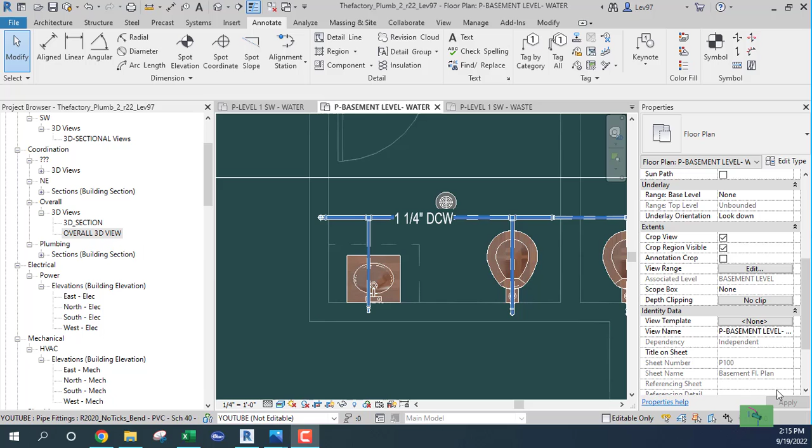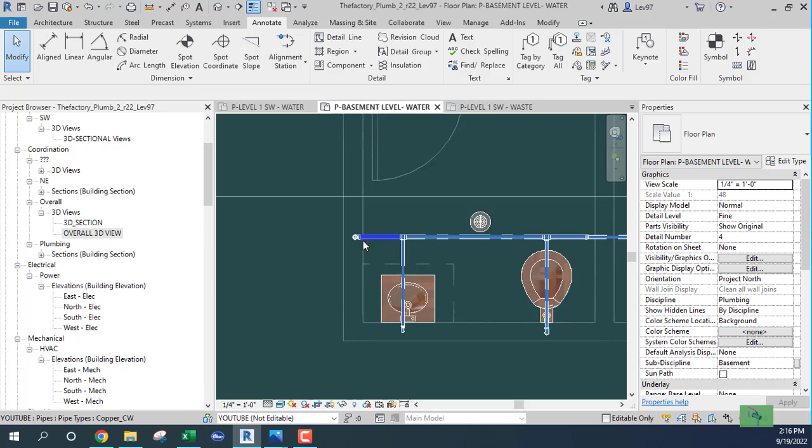Let's see, we're in the basement level. I think that's where I left off. Okay, did I size this? Let's just check. I want to check the fixture units and the size of this cold water that's supplying these two water closets and these two lavatories. I can go to my 3D view and check.

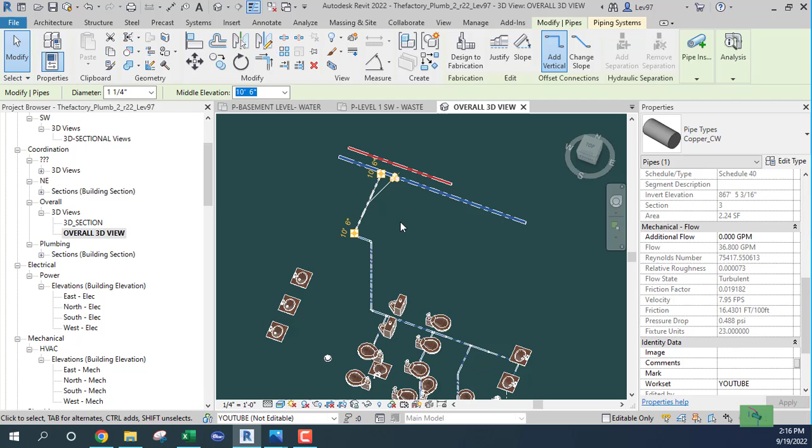So what do I have here? I have 23 fixture units and let's say 40 GPM, right? So what I can do is there are charts, and I'm going to use one here. I think it was 40 GPM. Let's see, it was 23. So these are in intervals of 5 fixture units: 20, 25, 30, 35, 40, and so on. So we have 23, let's say it's 25, and this is what's called a Hunter's curve, or Hunter curves.

The top one is for flush valves, and this bottom curve, number 2, is for flush tanks, or what is usually used in the industry is this line is for hot water and this line is for cold water, because hot water is usually not associated with flush valves. Flush valves are usually on your water closets, right? So that's why they like to associate the top curve with cold water and the bottom curve with hot water or flush tanks. But we have 25 fixture units, and let's say it's 40 GPM for cold water.

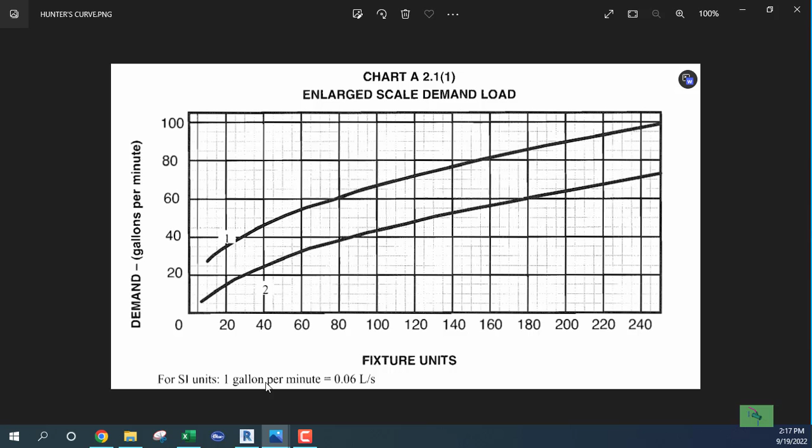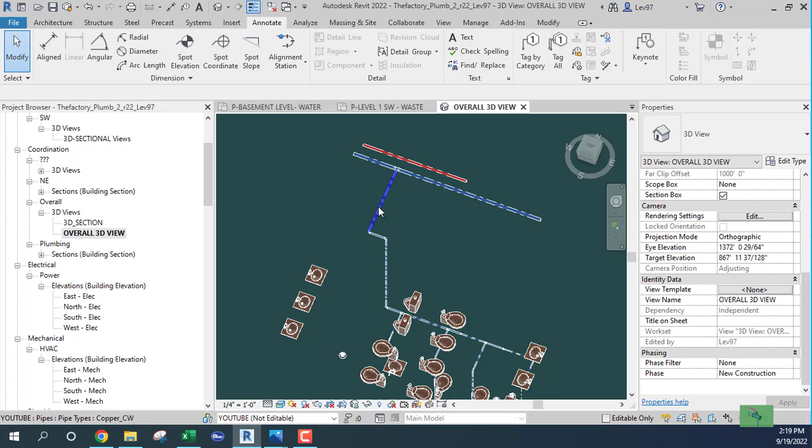So I think I was using 1 1/4. I think I'm going to bump that up. So 7 is about in here. I'm going to bump that up to, say, 1 1/2. So I think this is 1 1/4. Yeah. So I'm going to move that. That's all going down to the basement.

I was looking at this 3D view. If you click on this pipe, Revit is going to tell you up here what level you're on, right? So it's in the ceiling of the first floor at 10.6. So we can change this number, and we can say what it is relative to the basement. It's going to be higher, right? So you can manipulate this however you want to get some kind of reference, but that's what that's for.

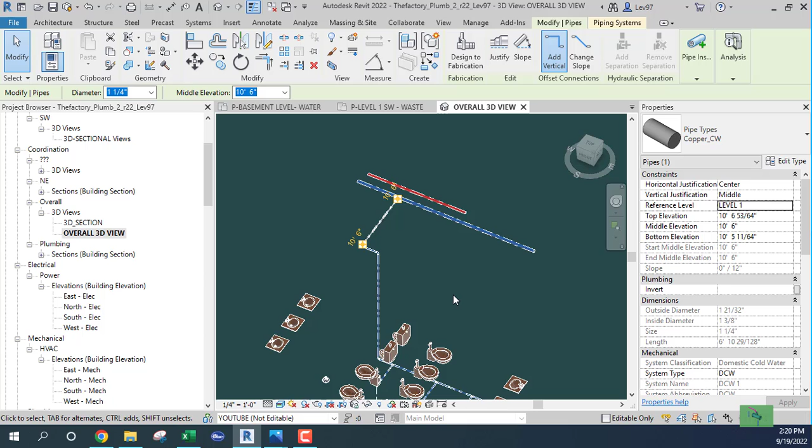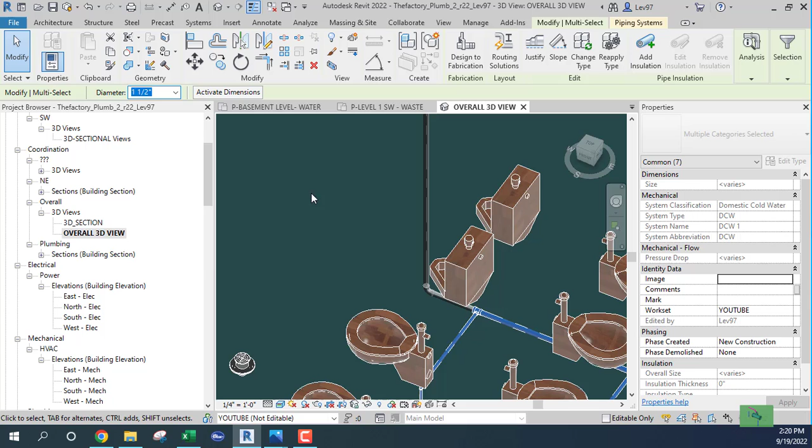So I see that it is 1 1/4. I want to change that to 1 1/2. Can I change all of this? Yeah. Okay. What about here? So I'm gonna control and change all of that piping to 1 1/2. Okay. So then it's gonna change again.

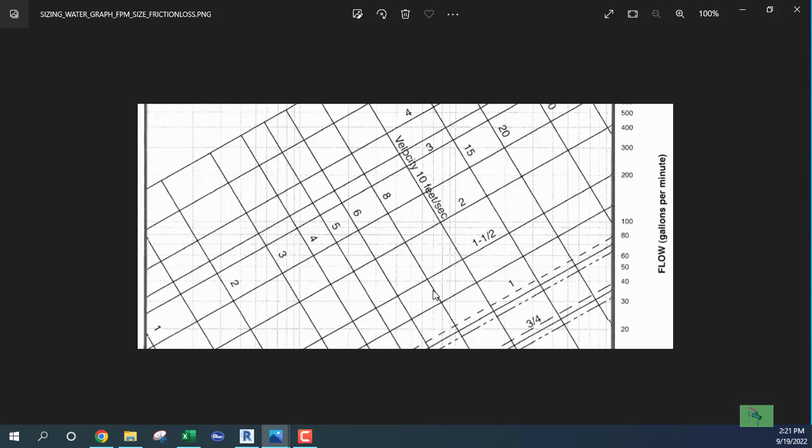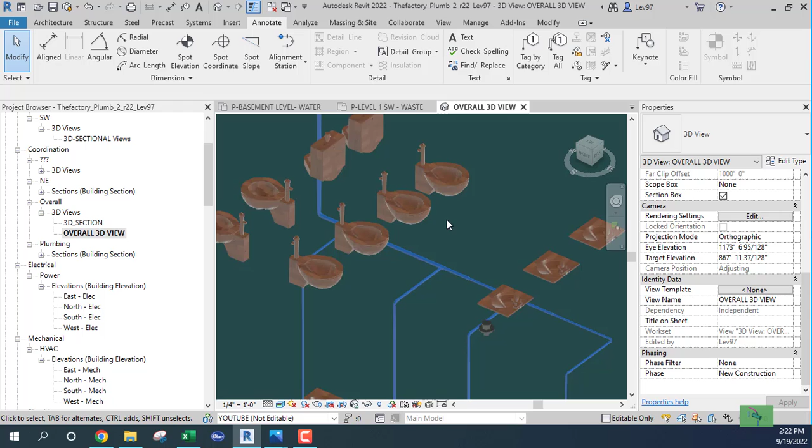But where are we? 35 and 7 are right in here. I should keep that at 1.5. Yeah, I think I'll keep it at 1.5. Just because, let's see, that's 1.5. So I'll keep that at 1.5, because this is gonna feed the lavatories, these 2 lavatories. Okay. So it should be okay now. That's 1.25. So 1.5 to 1.25. Okay.

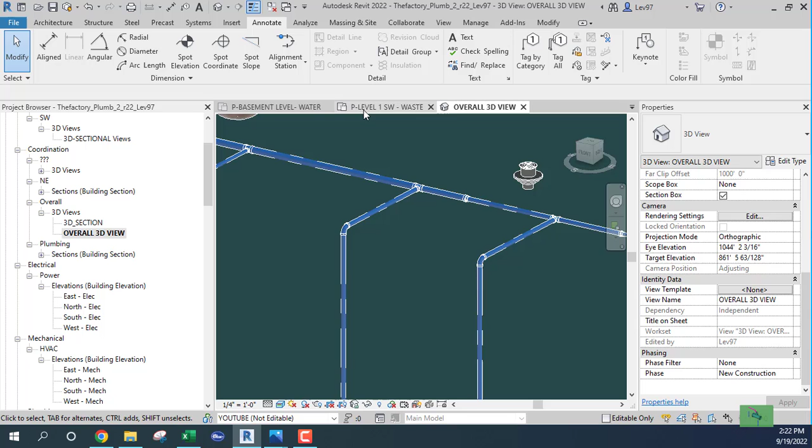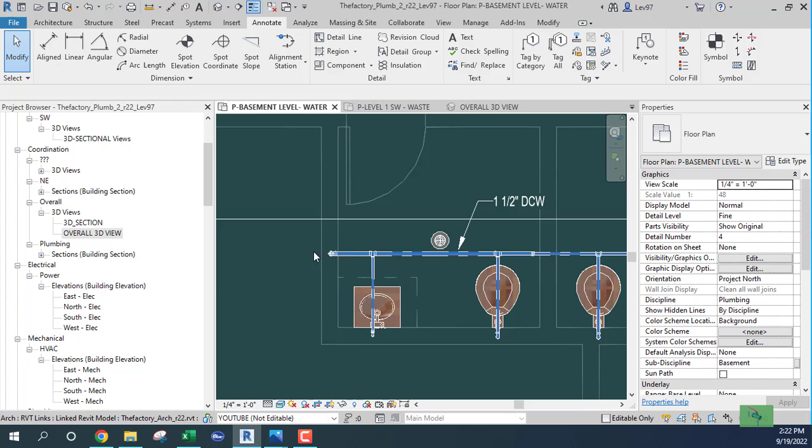Okay, so I think we've solved that problem. Let's go back to the basement level. That's fine. So this should be 1.5. Let's tag it. Free end leader. So we have a 1.5 here, right? I usually don't use notes on these, depending on your office standards. I usually don't write notes on what I'm doing. But just for reference, you go text, and you can choose any of these 4.

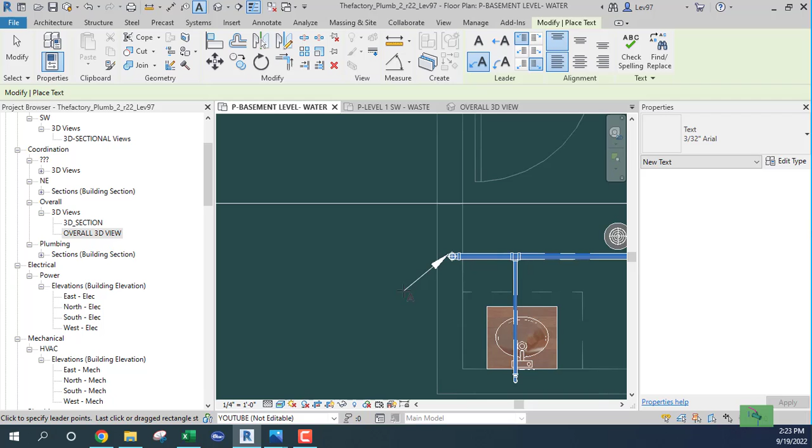That's no arrow. But I'm going to use this with a little leader on the edge of it, and just call it 1.5 inch cold water. Says cold water up. Right? Okay. And that's just text. This is annotative, because you go to annotate here, or you can go text, right? That's the difference.

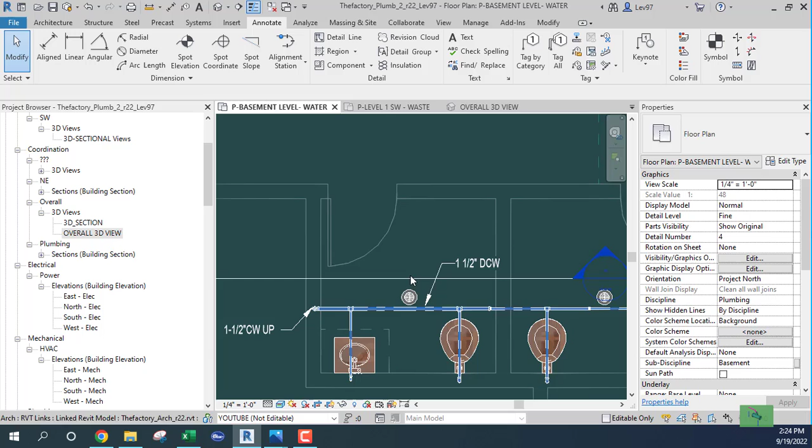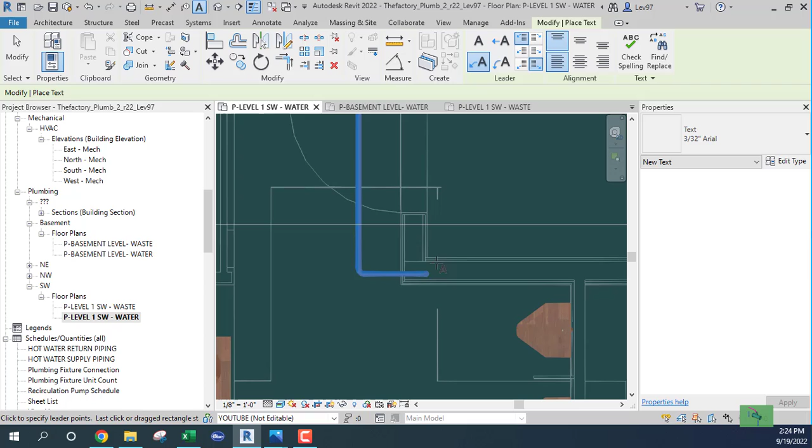Okay. So let's go back up to first level water. Do I have anything? Let's go first level water. Okay. And this is text, 1.5. Say 1.5 inch down, or we use DN. Okay. And that should be 1.5.

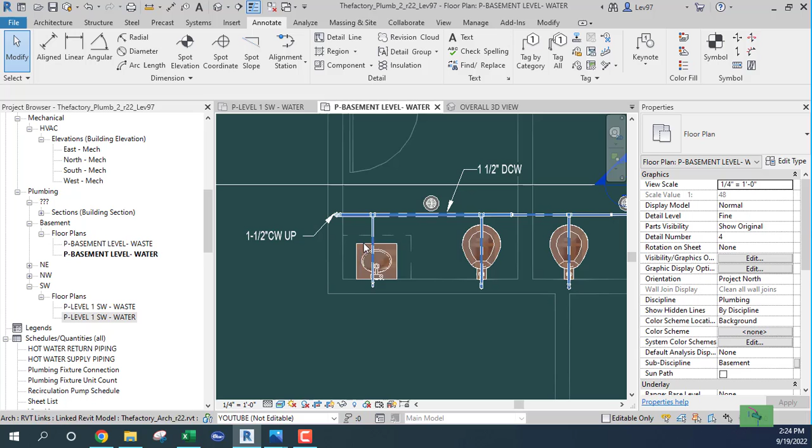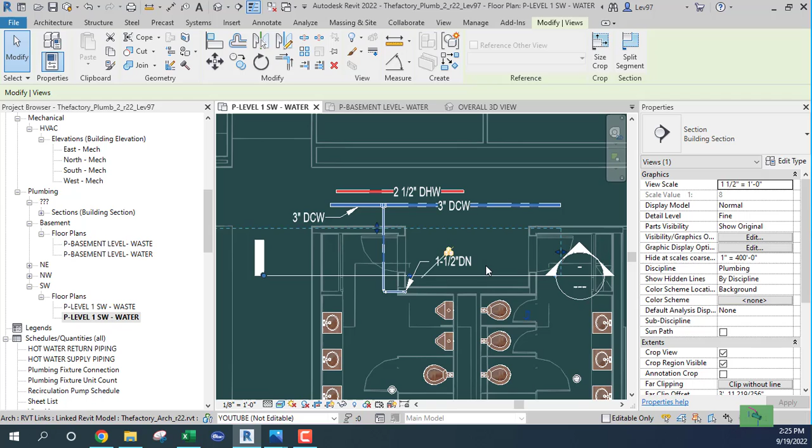Okay. So now what we need to do, I'm going to turn this off, is supply the basement with hot water to supply the 2 lavs here. Let's go back up. First level water, and we come off of this 2.5. It can't be any more than 3/4 inch. Okay. So what's this? Now might be a good time to look at some other information, some other disciplines.

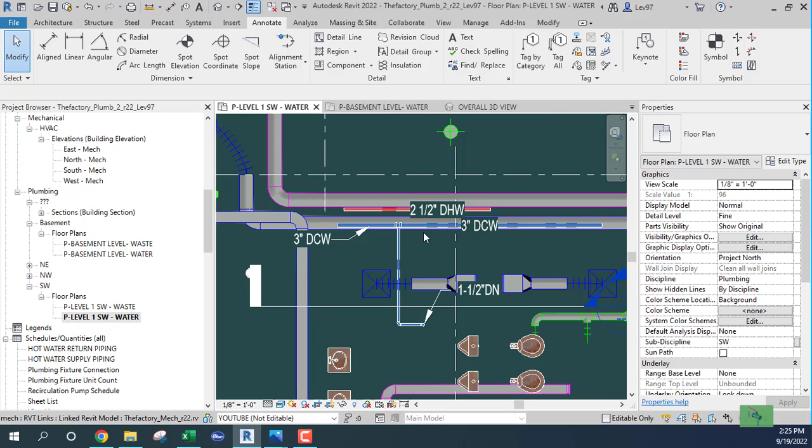Let's look at the mechanical. Okay, and I see that that's 12, and we can select, make sure that if I want to select the link, right? So this is a link model of the mechanical, and I can tab just to get some information off of it. I want to see how high it is. So it's above. Let's say it's above. Okay, you see? That's the reference level of basement. Because I was looking at it like the pipe is actually above, but I know the pipe is at 10.6.

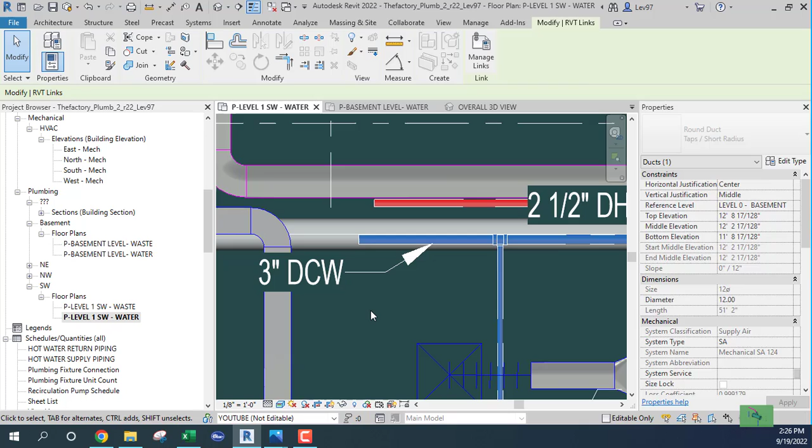So let's change this reference level. Oh, I can't do it if it's a link file. I can change the reference if it's not in the link file. But let's go here. Let's just take a look and see. I'm gonna cut a section through here. Let's go here, and just kind of move this down a little bit.

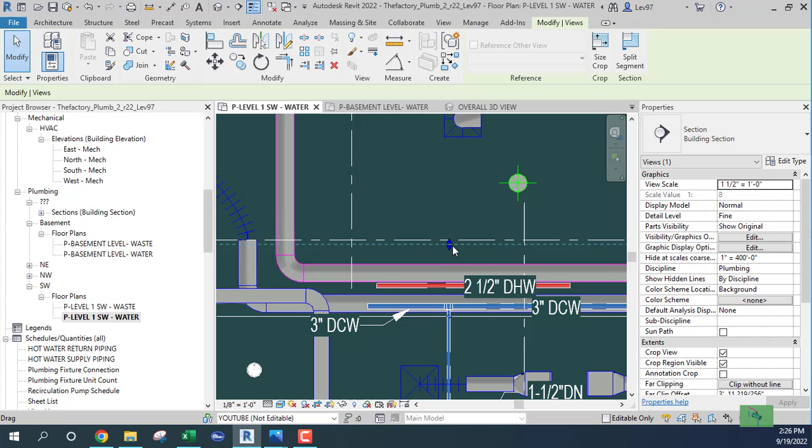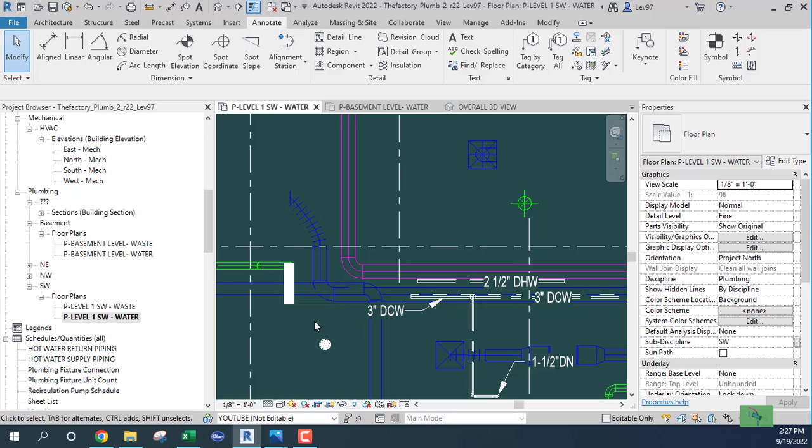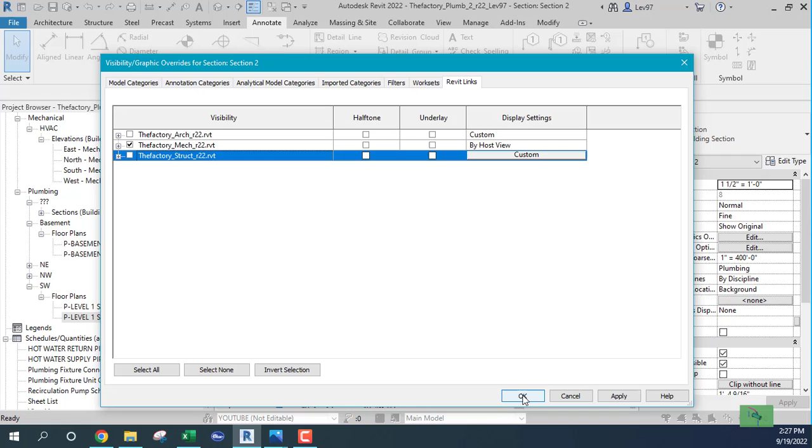Let's do this. Let's go hidden line, medium, fine, okay. It looks like it's above, but let's just take a look. Let's go to view, get our reference. What's our reference here? Okay, let's go section 2, and we're here. Okay, let's turn on the mechanical. Mechanical is on. Okay, do I have enough of it? Let's see, where is it?

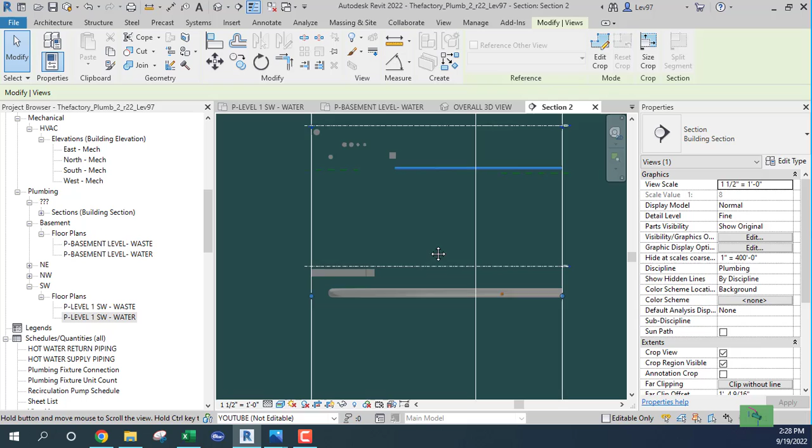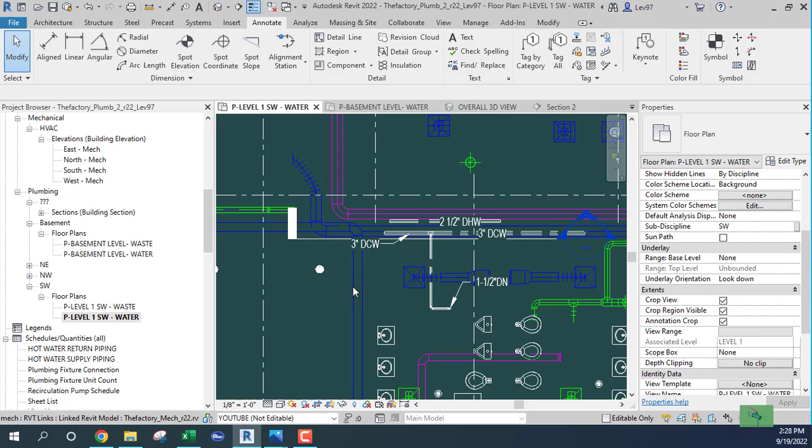Section. Is that it? Level 1. So that's in the basement. Level 1 water. That's in the basement. So I need to check. Let's look at the view range, because I don't like the way that is coming up. Well, wait a minute. Okay, yeah, let's look at the view range. -3. Cancel.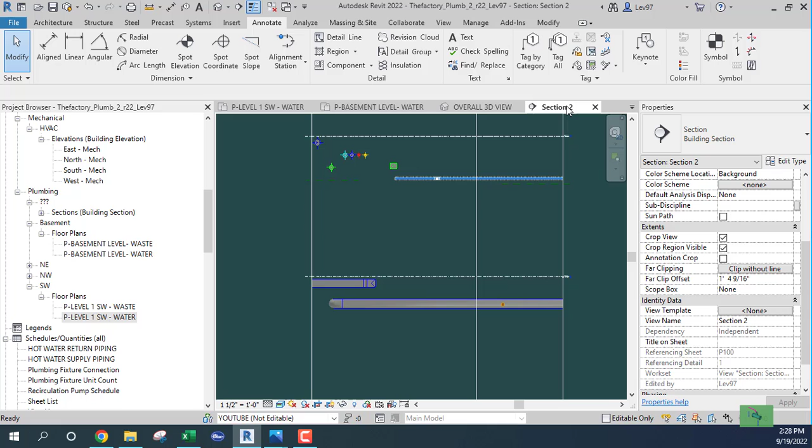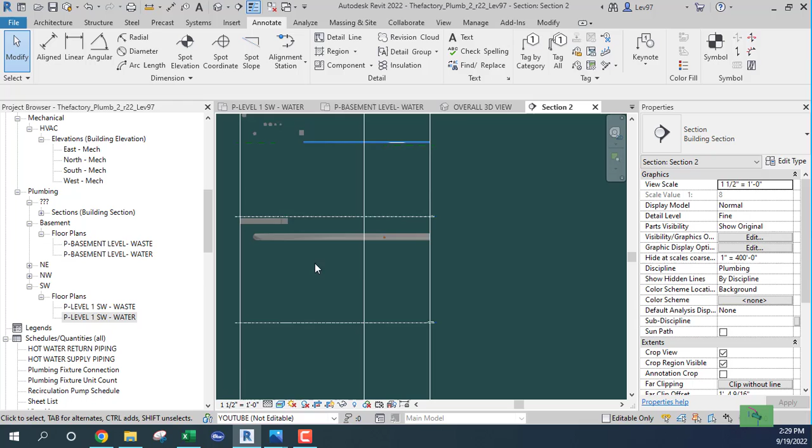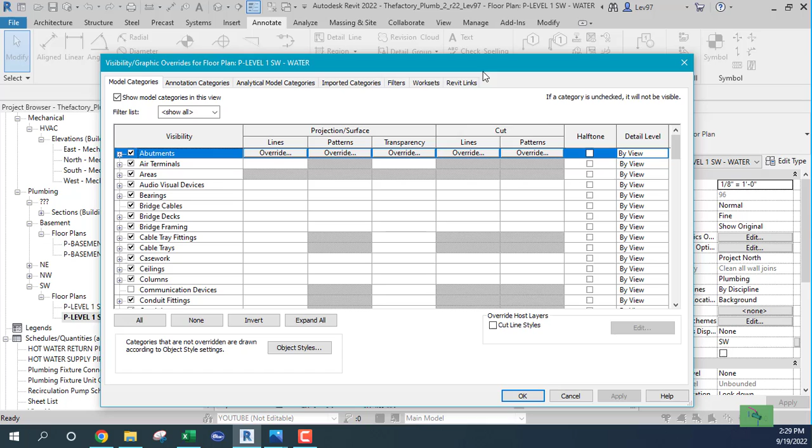Let's go back to this section. And that's level 1. So I'm going to draw a detail line, and yeah, that's why it's showing that 3. Okay, so, well, it's not interfering, that's for sure. It looks okay to me. Let's go back here. Wait a minute. Stay here. No, let's go back and look at the architects.

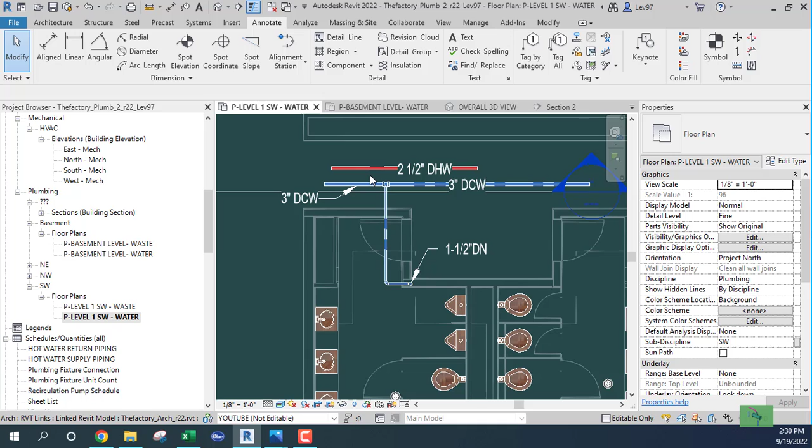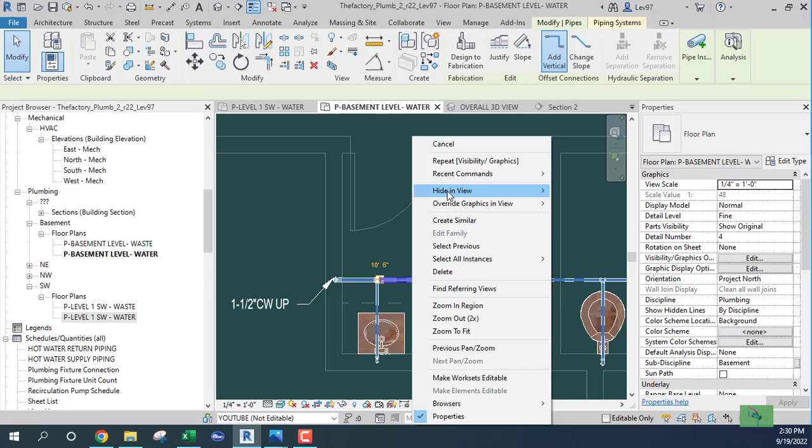So, okay. Let's go back here. And I think I'm going to come across, go down, basement level water. So I want to come down here, let's say. Let's do this. I'm going to create this similar just for construction, and then change this to hot water. Domestic hot water.

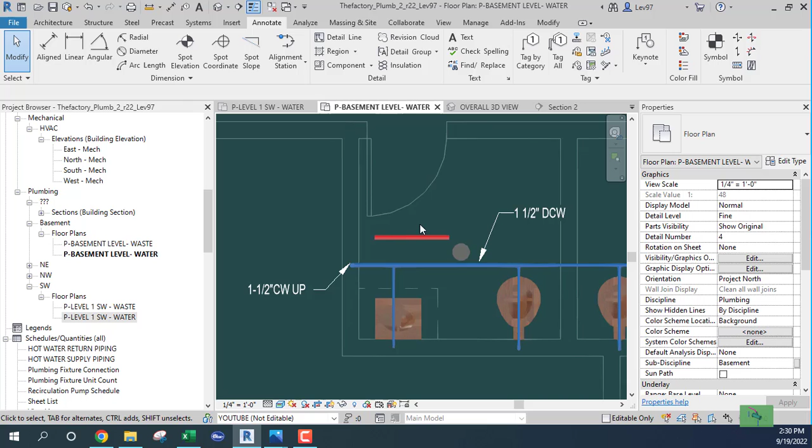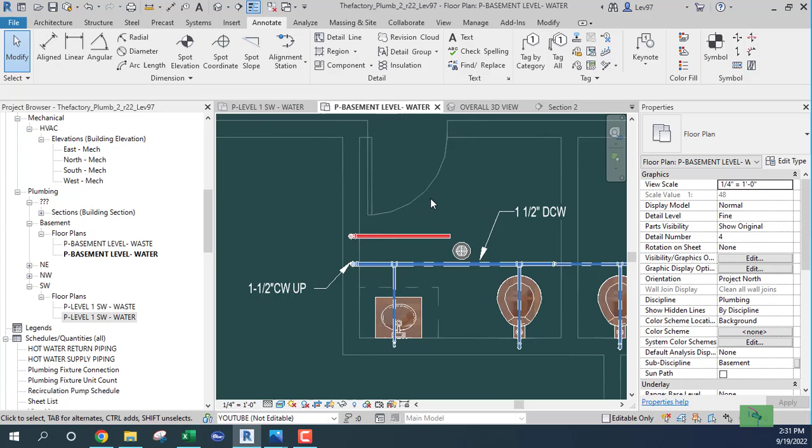Okay, let's turn off the links. And I want to go somewhere along here. Draw a pipe, 10.6. Let's change that to 30 because I'm going up. And say apply here. And I'm gonna move this over, tab. I'm using my arrow keys to go up. And go back up to the first level. And it's coming up here. Okay.

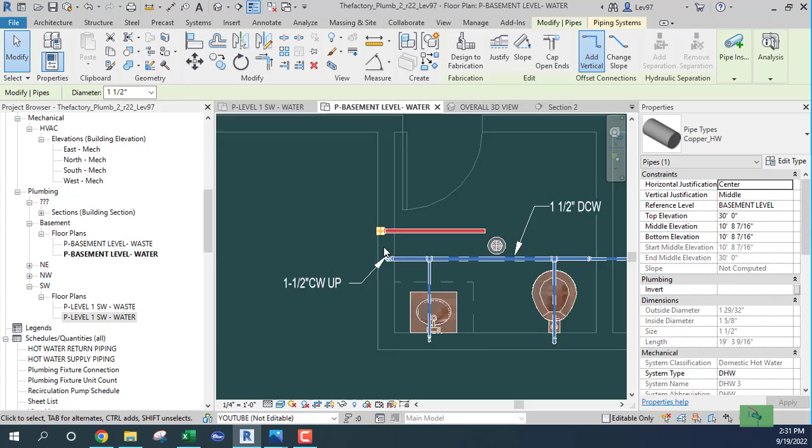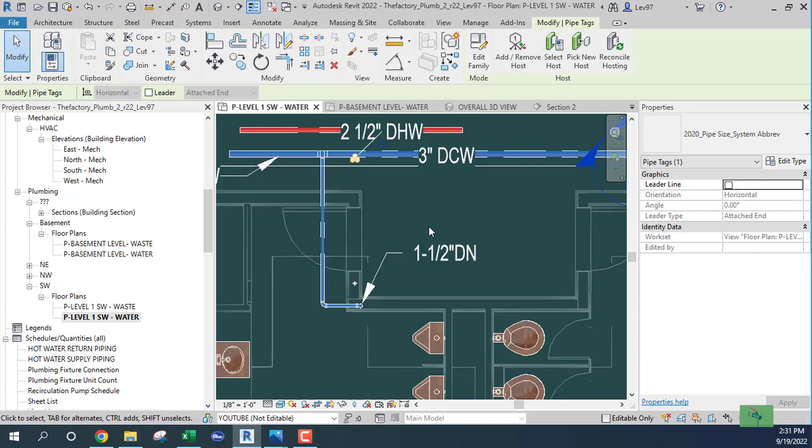Can I go over more? If I go over more, where would I come down? Let's go basement again. It might be okay. I think it's gonna be okay. I'm gonna leave it at that. Let the contractors figure out the rest, but I'm within tolerance here, I think. Water here, and I can come off. Let's delete that. Come off. Create similar, 3/4 inch.

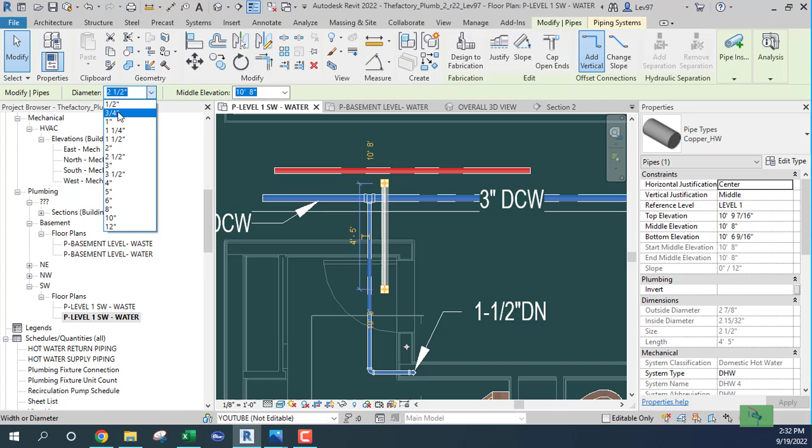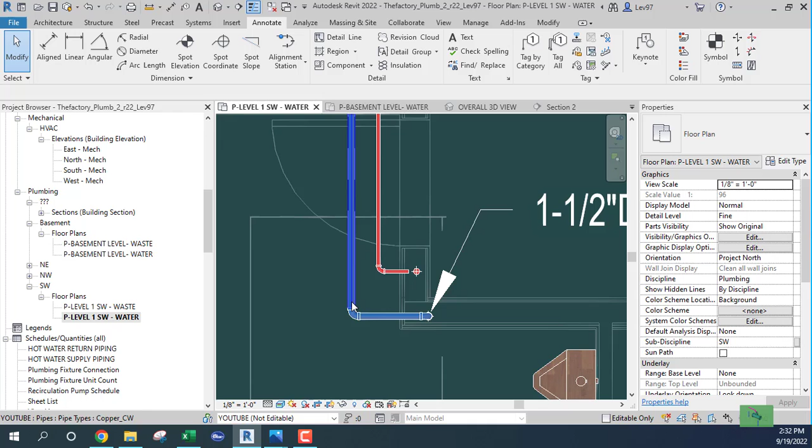It's at 10.8. My cold water should be at 10.6. And that is 3/4 inch. Okay. And so here, gonna drag this down. I wonder if I can get a dynamic. Yeah, that's good. Because I already established this riser, the horizontal is gonna pick up. And now what I need to do is go to my section view and get a reference and connect my horizontal with my vertical. Section view. Okay, so we are here, those two.

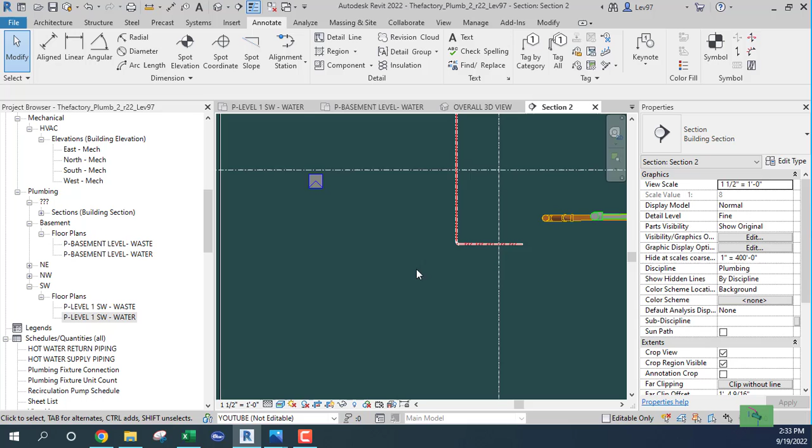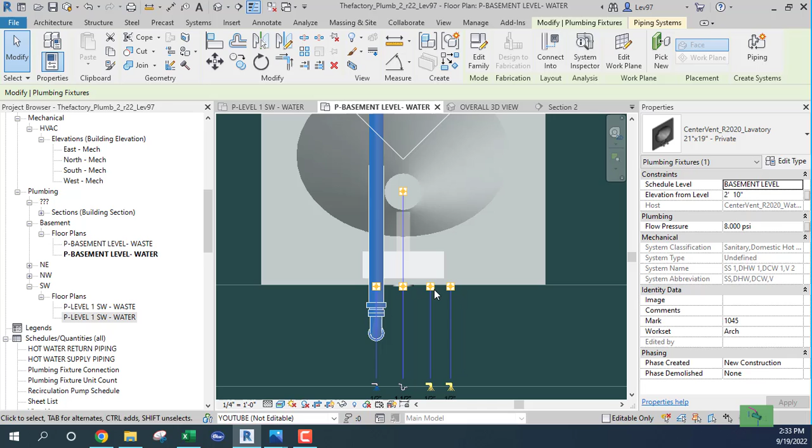Let's change this to a 3/4 inch hot water. Okay, and let's fill it in here. Modify, fillet, or trim. Okay, and now in the basement level, we have this. And so we can come from our hot waters on the left. Let me draw our pipe. Now this says sanitary, but we want domestic hot water here. And we go up in the ceiling space at 10.8.

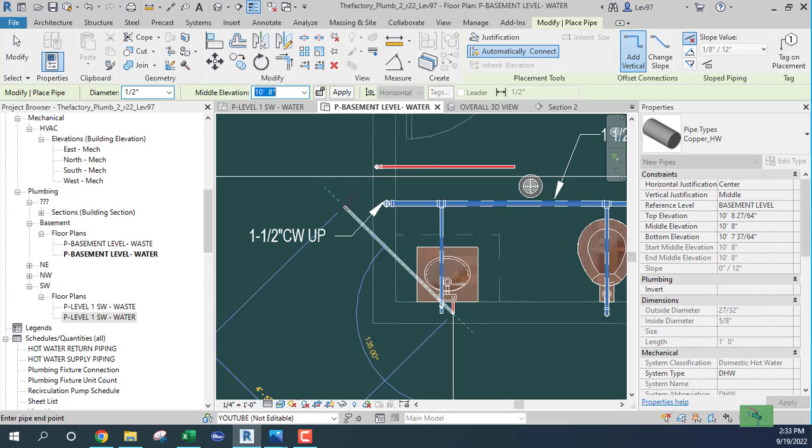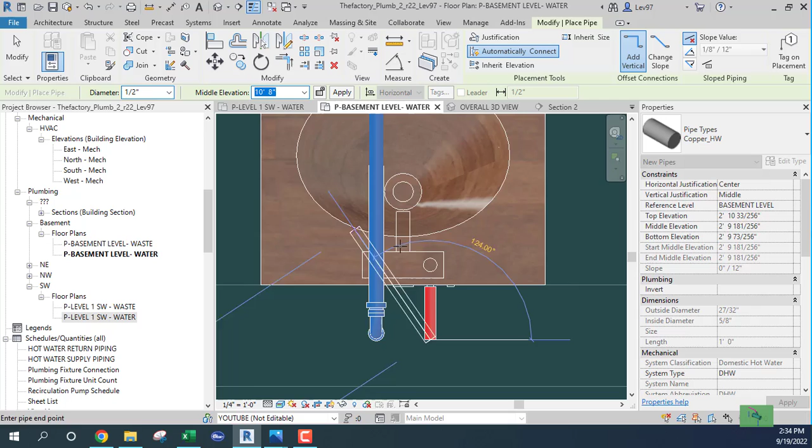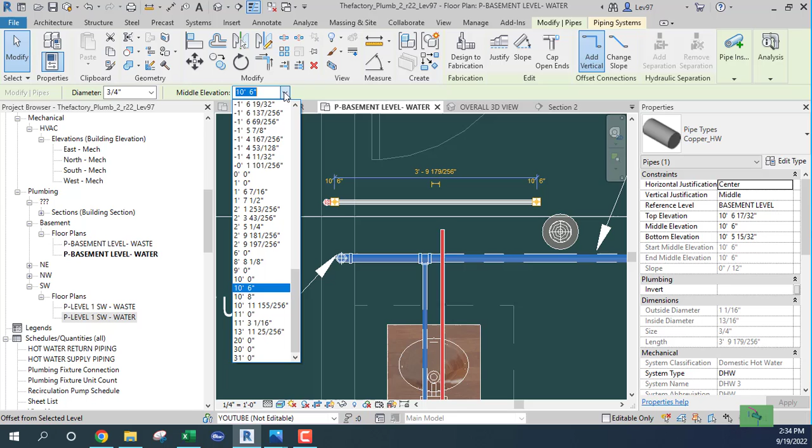Okay. I know it's 1/2, but oops, what's going on? Let's try it again. 1/2. 10.8. Okay, I don't know what happened the first time. And we can go here. Oh, I know what happened. I think this is at a different elevation. 10.6. Let's go 10.8 here. And let's extend this pipe, that pipe. Okay, that looks good. Got to go all the way over here.

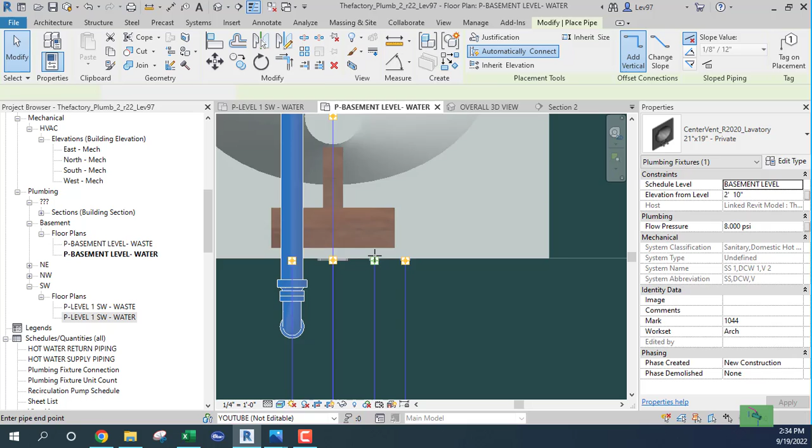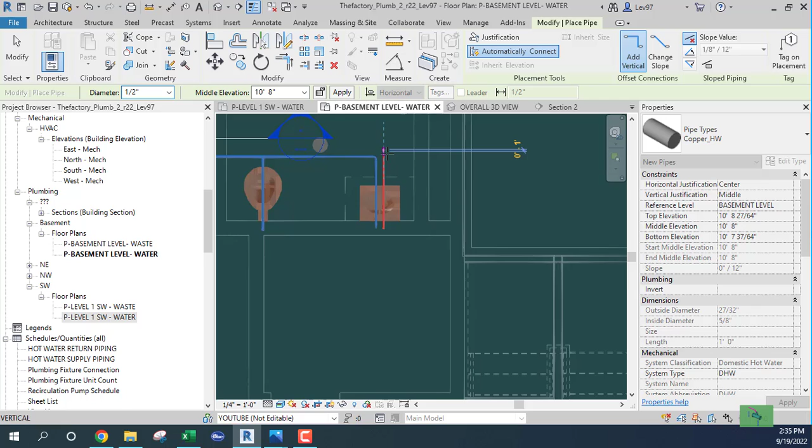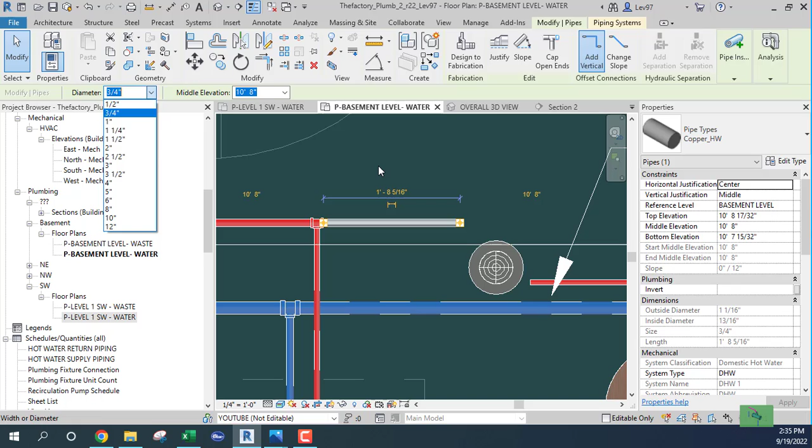Since I'm over here. So vent, hot water. Hot water again, copper, domestic hot water here. And change this to 10'8". And we go up here. Somewhere over here, we're going to make the alignment. Should be 3/4 inch. I'm going to change this to 1/2. Okay. That's very small, 5/8. I'm gonna leave it like that.

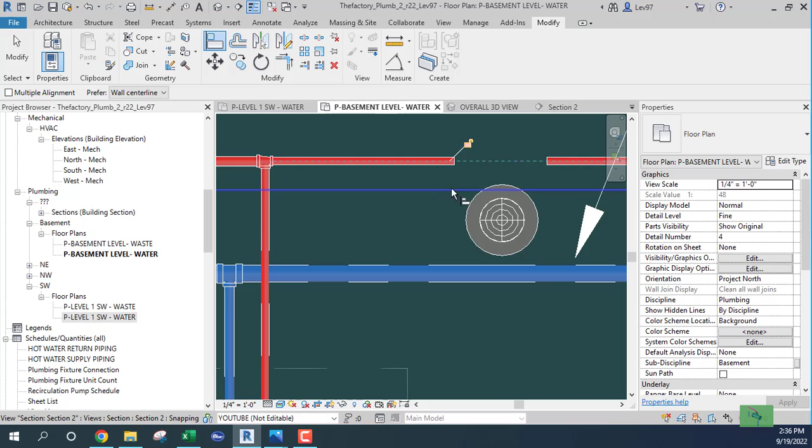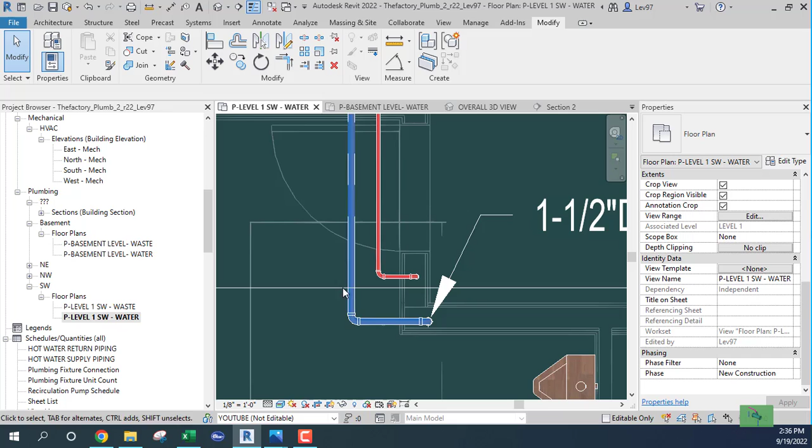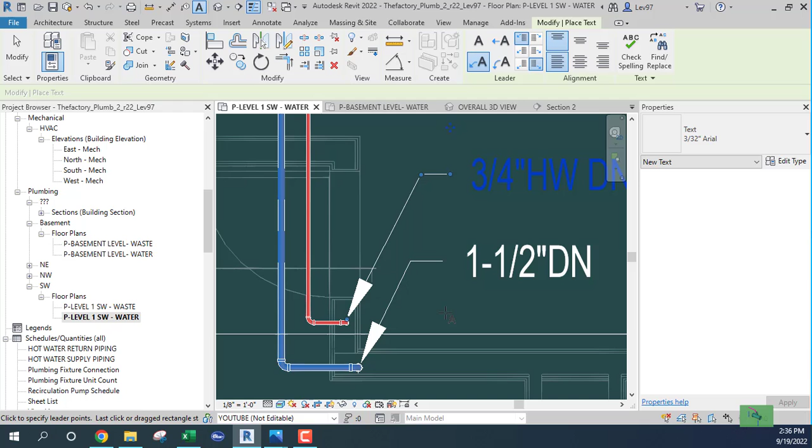Align one pipe to the second and fill it here. 1, 2, that looks good. And we have fixture units. 3 fixture units in the flow, okay. And we come up to the first level, and the text says 3/4" hot water down. Okay. And it's connected to our hot water in the ceiling space here. Okay, so slowly but surely getting there.

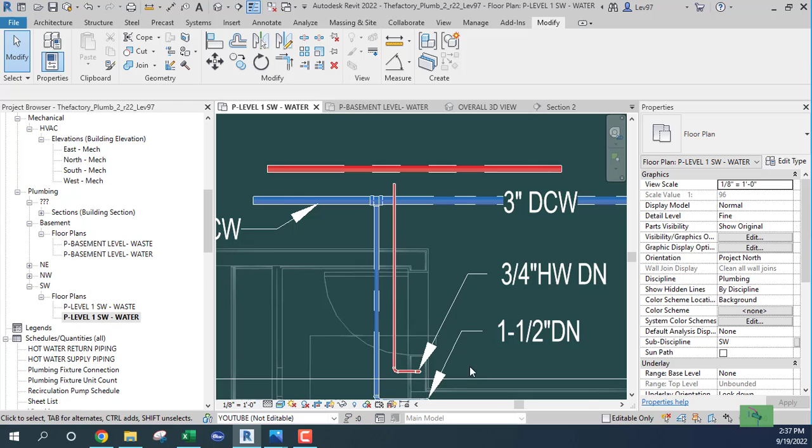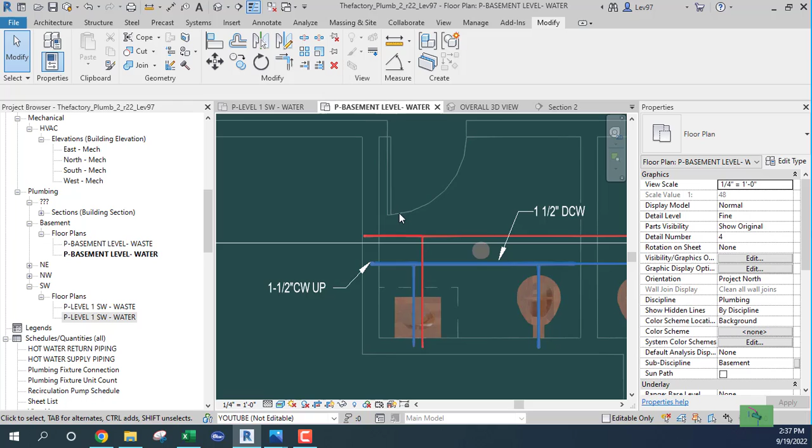So that's what I wanted to go over today, was the hot water and how you can set up your piping so that you're in the wall and you're not guessing about where it's going to come out. You have to set up some kind of a reference point. Like when I was in the basement, I knew that I couldn't come down in this area, right? I can't come down in the middle of the room. I have to use this wall, or somewhere along here. So that way everything works out.